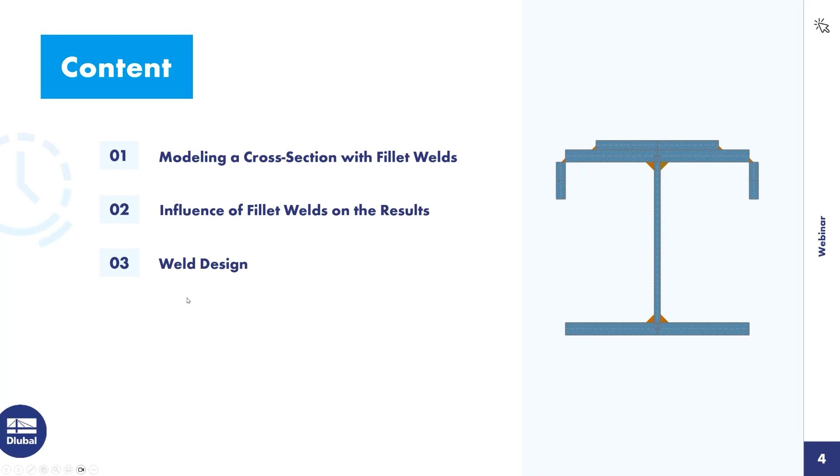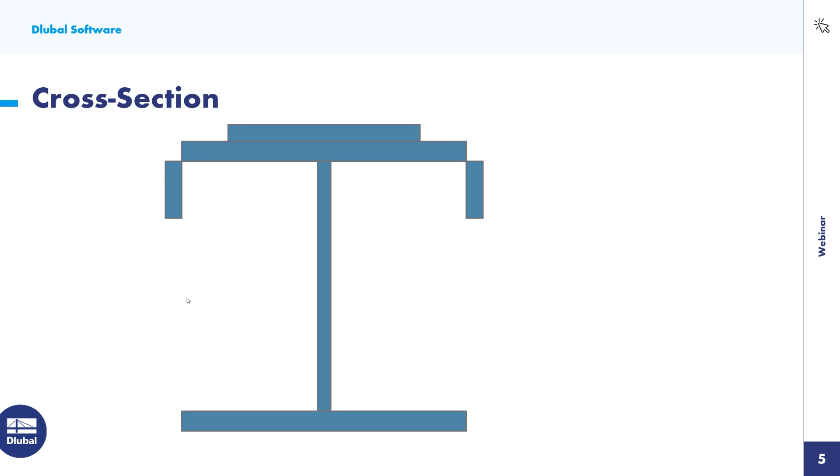The presented I-section featuring a welded reinforcement and welded lips on the top flange will be modeled in RSECTION. During this process, the types of fillet welds available in the program will be introduced. The throat welds are modeled using a standard fillet weld. The connection between the reinforcement plate and the flange is created using a lap fillet weld, while the lips are attached to the flanges via corner fillet welds.

To begin, I create a new file in RSECTION. I name this file example1. Since weld stresses can only be calculated using the analysis method thin-walled analysis, I select this option. For the material, I choose steel S235. This material is already inserted in this file, but if you would need another material, you can choose this from the material library.

I insert the I-section to be modeled from the cross-section library. I use the section type parametric thin-walled since this section type allows me to define the parameters of the cross-section manually. For the welded cross-section, I also choose the manufacturing type welded.

When inserting the cross-section, I disassemble it into its individual components to allow for further editing. To ensure that the force transfer occurs exclusively via the weld and not through adjacent elements, a separation joint must be defined on the welded element. Let me explain this in more detail.

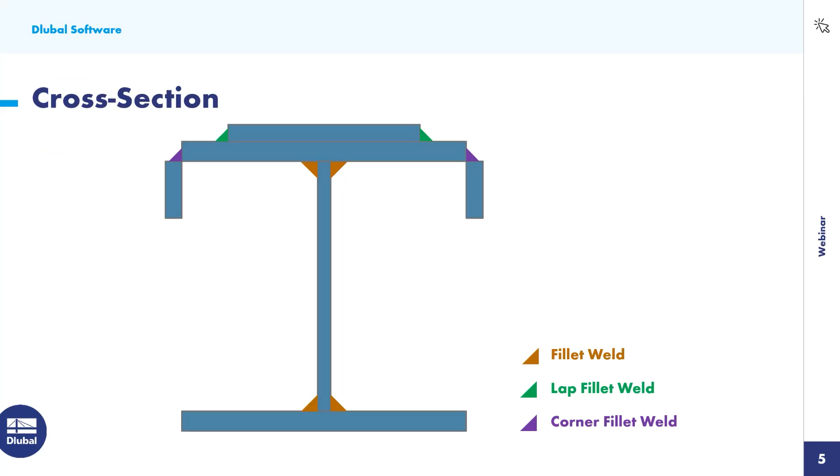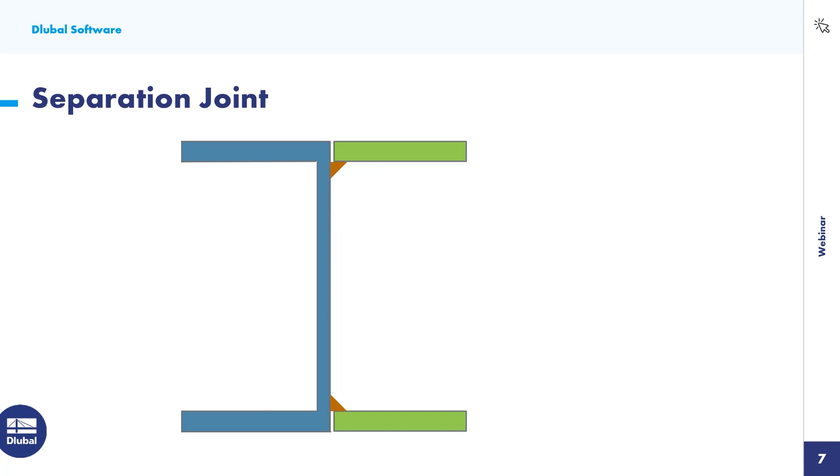In this example, the web is welded to both the top and bottom flanges. In this case, the web is considered the welded element. Therefore, separation joints must be applied at both the beginning and end of the web, in other words, at its connections to the flanges. If, on the other hand, the two right-hand flanges were to be welded to an existing section, the separation joints would need to be defined on the flanges, as they would then be the welded parts. The separation joint is defined directly within the corresponding element.

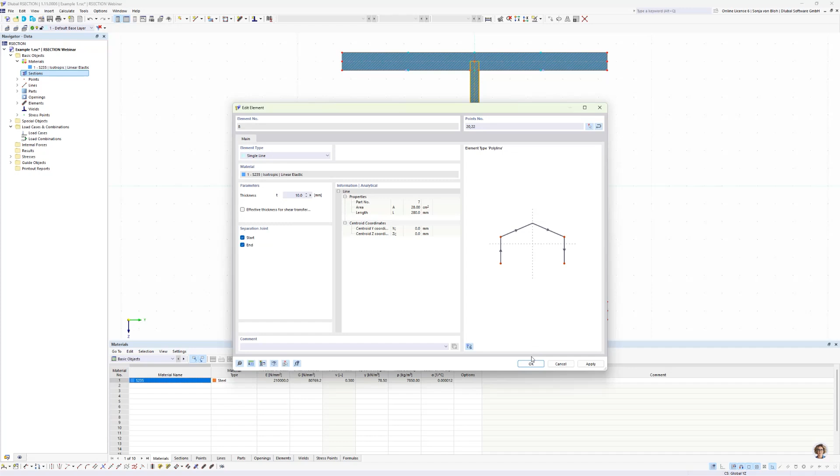In this case, I open the Edit dialog of the web, and here I define the separation joint at the start and end of the element. For verification, the separation joint is also shown graphically in the model.

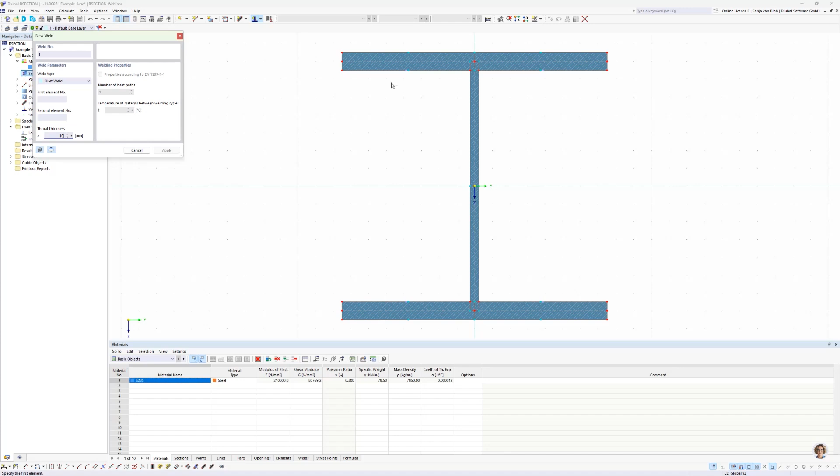Next, I define the fillet welds. For this, I use the weld type fillet weld. First, I define the throat thickness. This should be 10 millimeters. Then I select the elements to be connected by the welds. These are the upper flanges to the web and the lower flanges to the web.

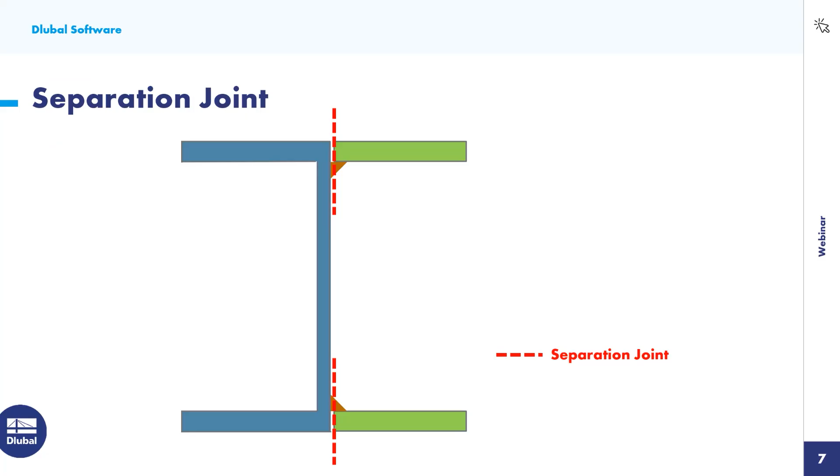The connection between the flange and the web is made via the fillet welds. I would now like to show in detail how these welds are represented. To do this, I examine the connection between the web and the top flange. The previously defined separation joint on the web ensures that there is no direct connection between the web and flange. Force transmission takes place exclusively through the weld.

The program generates the connection elements shown in green, which represent the fillet weld. This configuration results in a closed cell, which leads to a Bredt torsional moment of inertia being taken into account in the cross-section properties. The welds have a noticeable effect on the stress distribution.

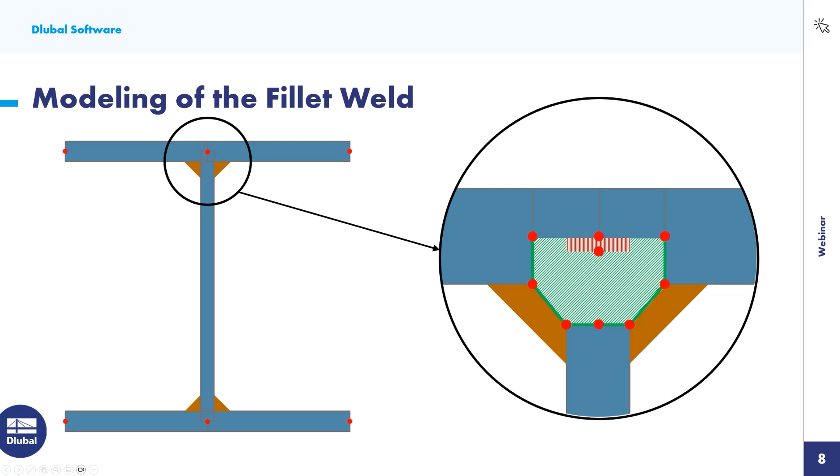For comparison, I create an additional file with identical cross-section but without welds. I name this file example2. I choose here once again the analysis method, thin wall analysis. I use the material S235 and I define the I section with the help of the cross-section library.

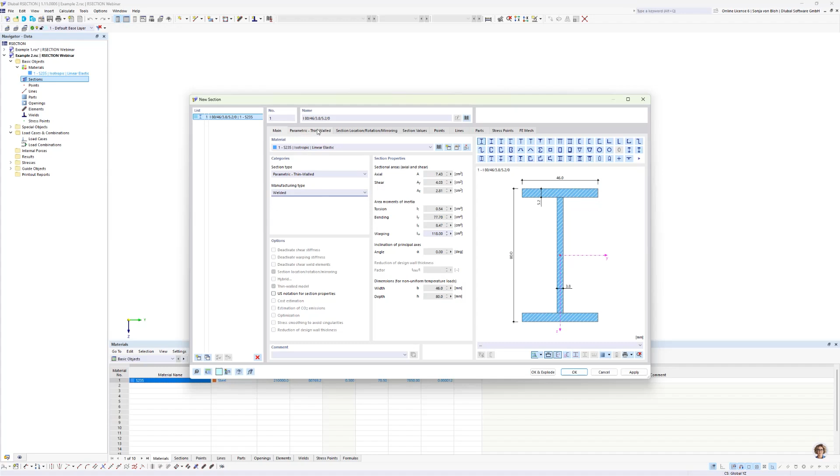Here I choose the section type parametric thin-walled, the manufacturing type welded, and I define the dimensions of the cross-section: height 300 millimeter, width 300 millimeter, thickness of the web 10 millimeter, thickness of the flanges 20 millimeter. I insert the cross-section with OK and explode.

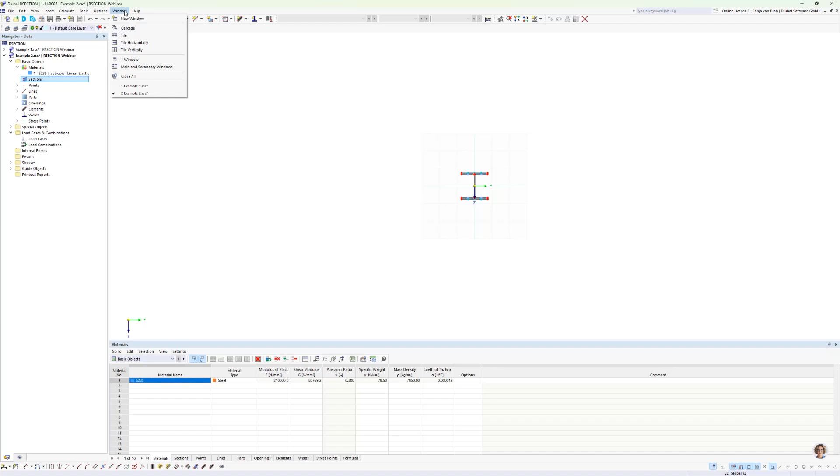To directly compare the cross-section properties and stresses, I display both models side by side, and for this I use here this function tile vertically. Then I start the calculation in both files.

As already explained, the torsional constant in the file with weld is higher because of the additionally considered Bredt torsional moment of inertia. Here I have a torsional constant of 195, and in the file without welds I have a torsional constant of 162. I then compare the unit shear stresses due to torsion.

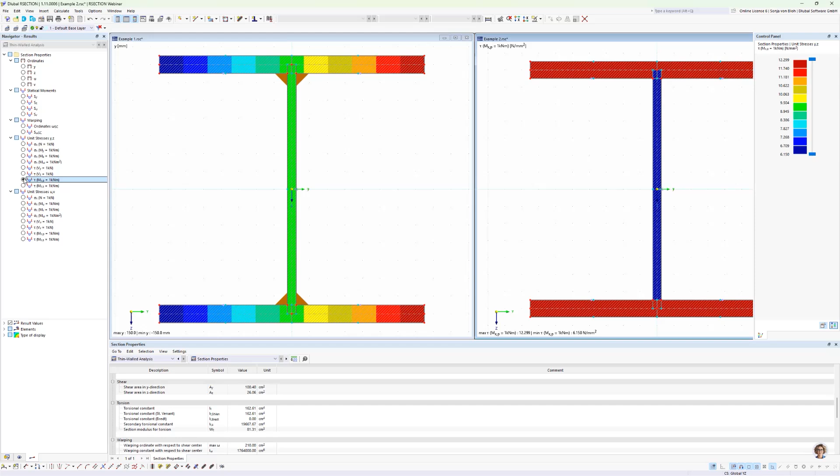For this, I activate here the unit shear stresses in both files, and I choose here the type of display off, and also in this file. In the region of the closed cell, due to the welds, higher torsional shear stresses are observed in the welded section, while lower stresses occur in the remaining areas of the cross-section.

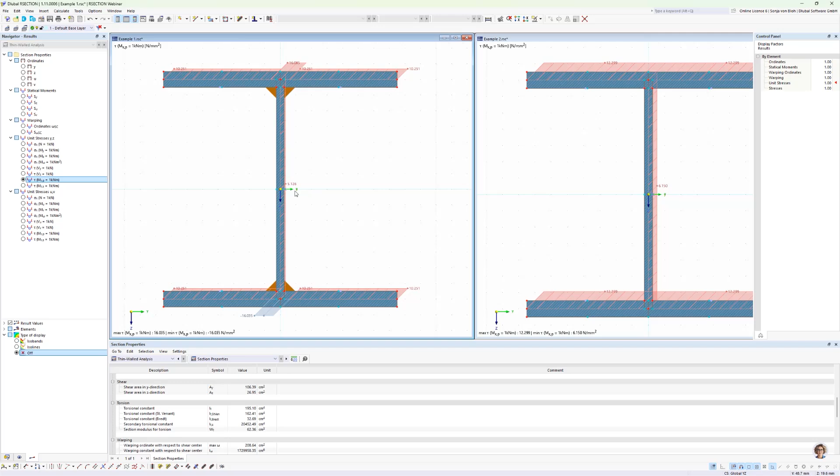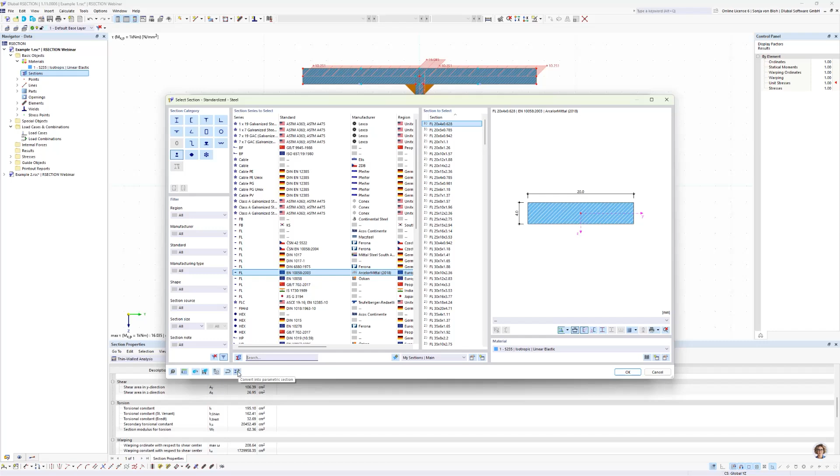To further reinforce the I section, a flat steel bar is welded to the top side of the flange. I select a flat steel profile from the section library. For this, I open the navigator data and insert a new section, a flat bar. I want to define the dimensions manually, and I want to define here a width of 200 millimeter and a height of 50 millimeter.

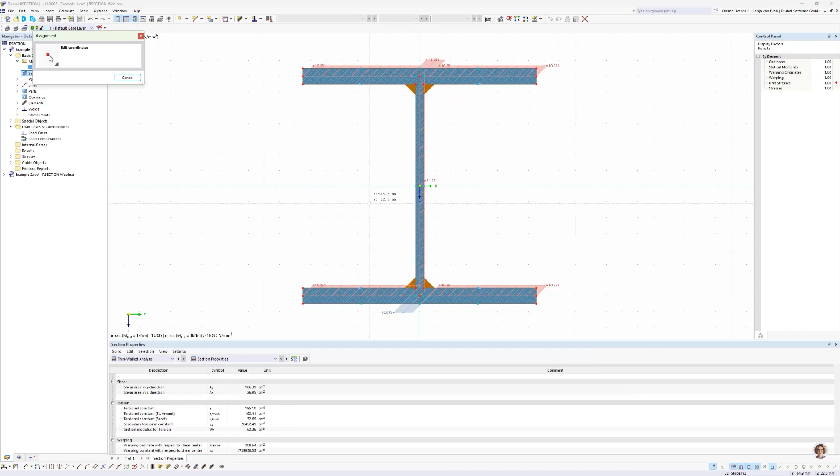In the graphic preview, I set the center of the bottom edge of the flat steel as the reference point. I then select the insertion point in the working window, which corresponds to the center of the top flange. After confirming with OK and explode, the flat steel bar is placed centrally on the top of the flange.

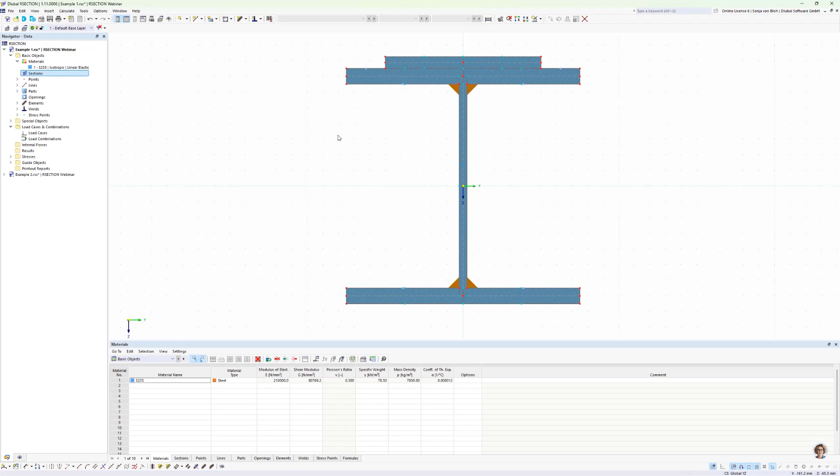The connection between the flange and the reinforcement is made via a lap fillet weld. This type of weld provides a direct connection between both components, making additional connection elements unnecessary. Lap fillet welds are suitable for elements that run parallel to each other and make contact at least at one point. So I open the lap fillet weld dialog, and here I define first the throat thickness of 5 millimeter.

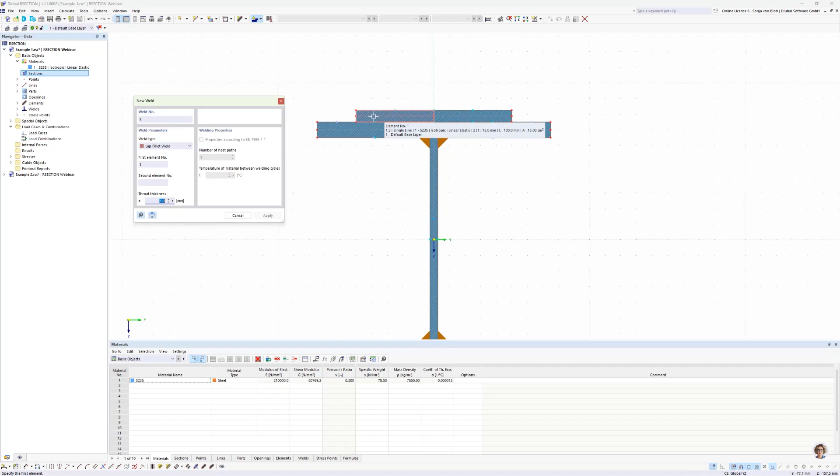The first element to be selected is always the one whose front face the weld will be applied to. And this is here, this element on the top. As soon as the mouse hovers over the second element, a preview of the weld appears in the working window. Clicking on the second element completes the creation of the weld.

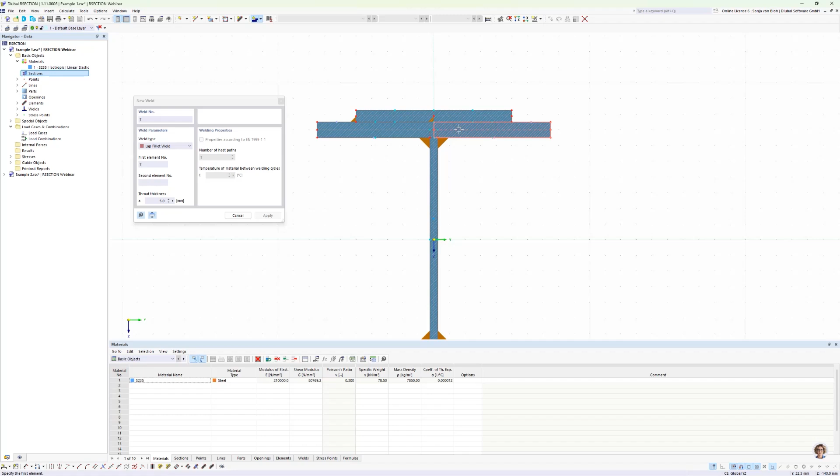On the right-hand side, I do the same, but I see here that the weld is not placed as intended. This is due to the graphical input method, where the first weld is automatically placed at the start. Only a second fillet weld on the same element would be generated at the element's end.

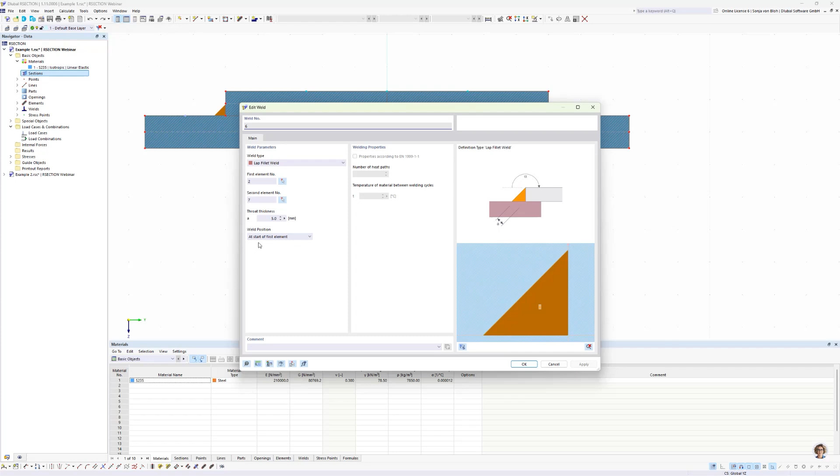To correct the weld's position, the orientation of the first element can be reversed. I will do this here in this file. I select here reverse element orientation, and now the weld is on the correct location. You have an alternative way to do this. For this, I undo this action. You also have the possibility to define the position in the weld dialog, and here you can choose the weld position at end of first element.

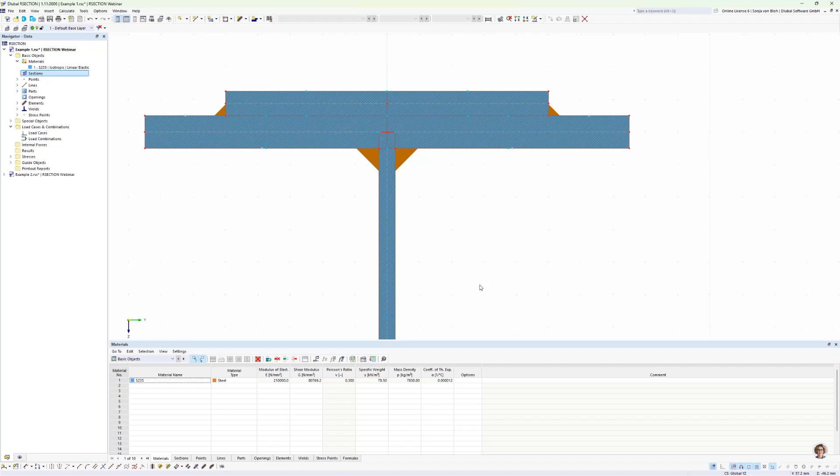To further reinforce the top flange, additional lips are welded to the sides. For this, I select a flat steel profile from the section library. So I open the section library again. I choose here bar sections, convert into parametric section, and then I define here the width. And the width should be 60 millimeter and the height 15 millimeter.

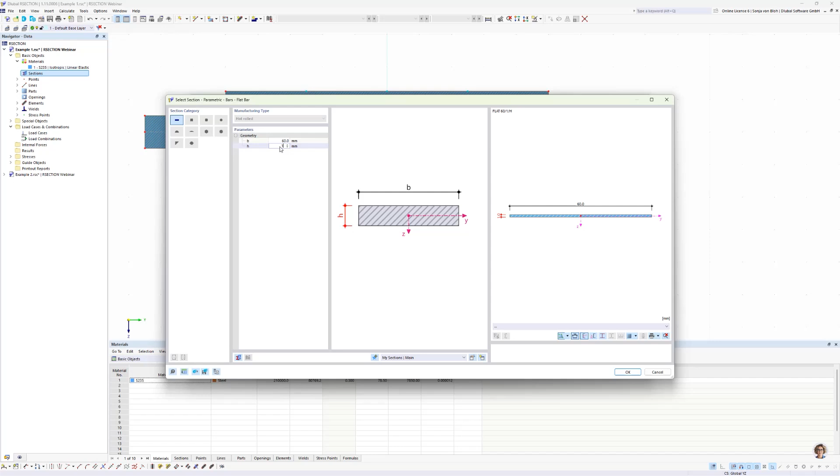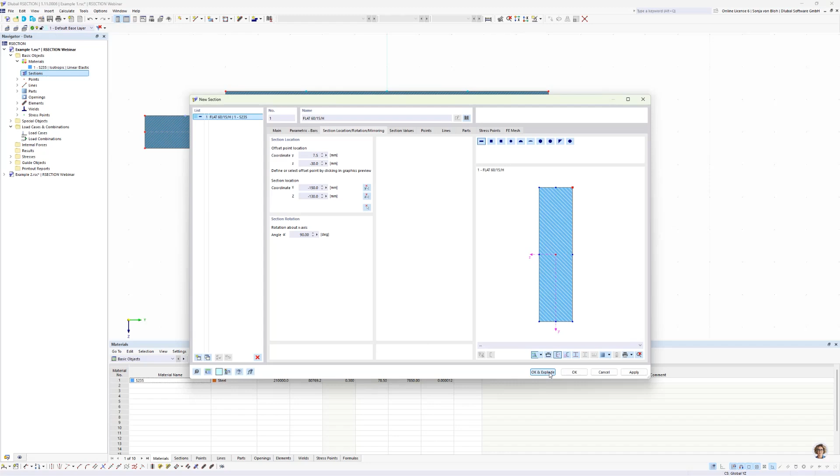I have now to rotate this cross section, and I do this in the step section location rotation mirroring, and I define here the rotation about x-axis, about 90 degrees. In the graphic preview, I set the upper right corner of the profile as the reference point. So I click here on this point with the mouse. The insertion point is then selected as the lower left corner of the top flange in the working window. And the cross section will be inserted with OK and explode.

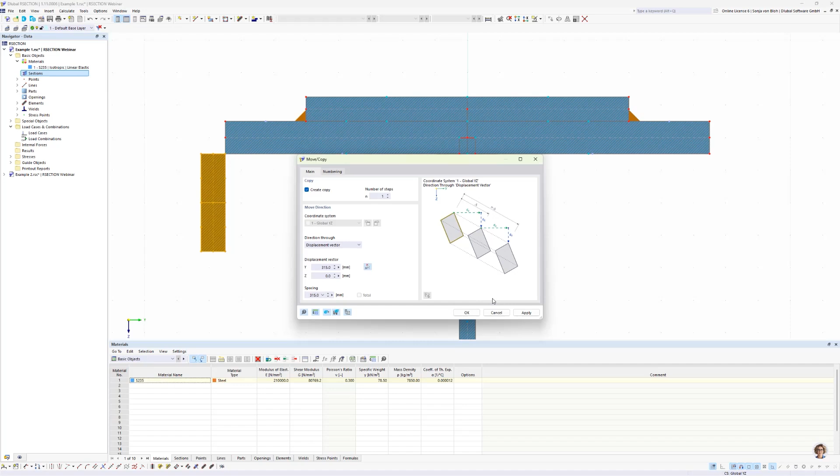The inserted lip is then copied to the right-hand side. To do this, I select the component, and then I choose the Move Copy command. In the dialog that opens, I activate the checkbox Create Copy, and then I define the displacement vector. And click on OK. The connection of these parts is made directly using a corner fillet weld, meaning no additional connection elements are required. The only requirement is that the elements must touch at least at one point.

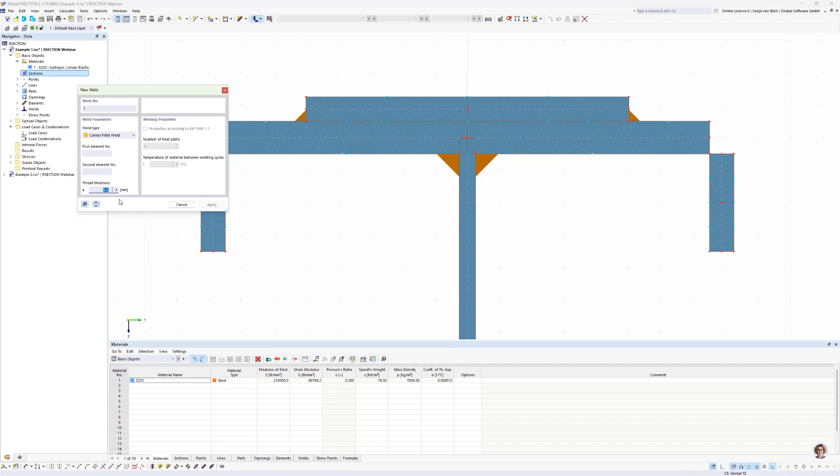So I open here the corner fillet weld dialog. I define a throat thickness of 5 millimeter, and then I select the elements to be connected. The elements are selected one after the other using the mouse. The order of the selection does not matter. So I select here these elements. The welded cross-section is now fully modeled.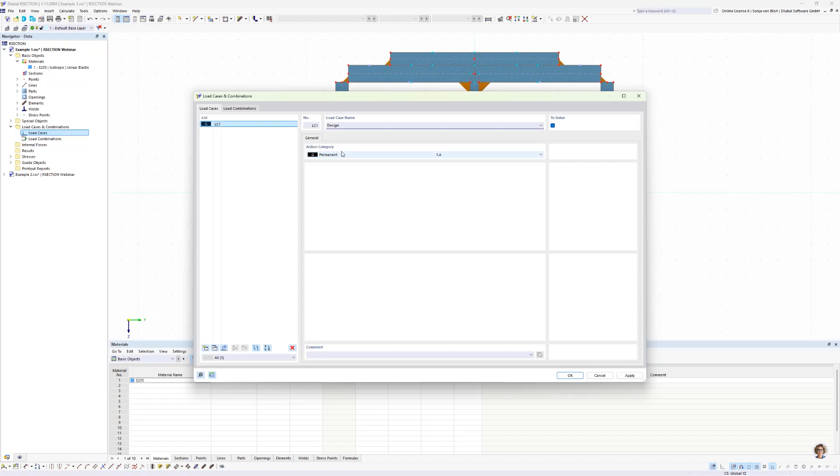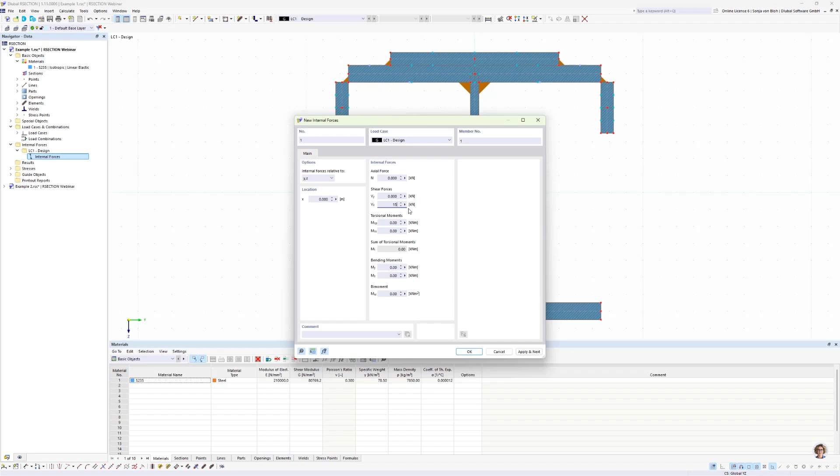The next step is to perform the weld stress checks. For this, a new load case must be defined. So, in the navigator data, I create a new load case and I define the load case name design. Within this load case, I define the relevant internal forces. So I open here in this load case the internal forces dialog, and I specify a shear force of 150 kilonewton.

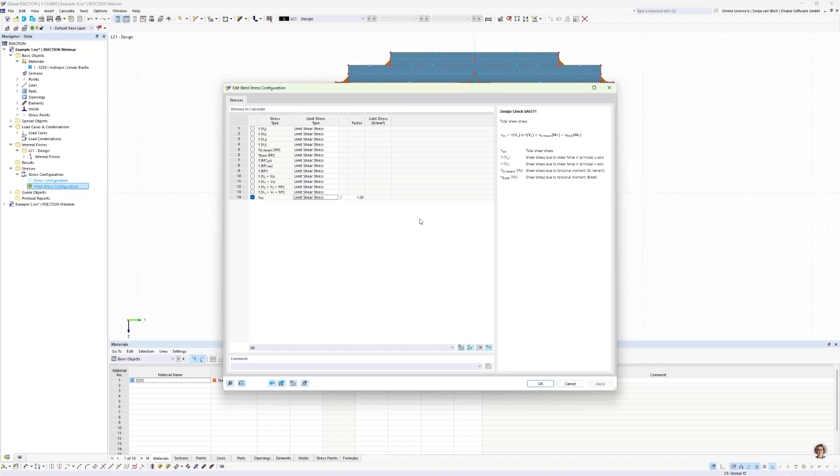The selection of the weld stress components to be calculated is done in the weld stress configuration dialog. You find this dialog via the navigator data, here under stresses, stress configuration, weld stress configuration. Here you can choose the stresses to calculate, and here it's also possible to define the limit stress types. The limit shear stress is calculated automatically, but it's also possible to define the limit shear stress user-defined. I leave the default settings unchanged, so I click here on OK. I then start the calculation.

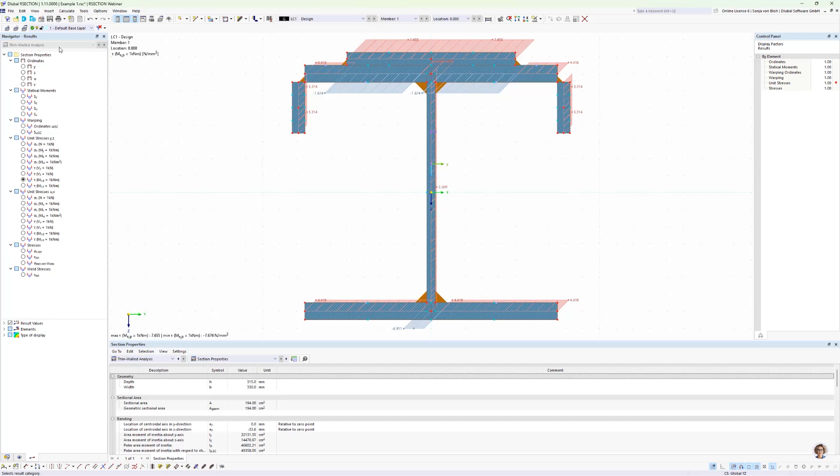The weld stress results are displayed both graphically and in tabular form. The graphical results are located in the navigator results under weld stresses, and here I have to use the type of display isobands, and then you see here in the stresses directly the weld stress values. The tabular results can be found as a subtable under analysis of thin walled structures. So it's here this subtable weld stresses. This table includes the calculated stresses, the allowable limit stresses, and the resulting stress ratio. With that, all steps for modeling the welded cross-section and performing the weld stress design in RSECTION are complete.